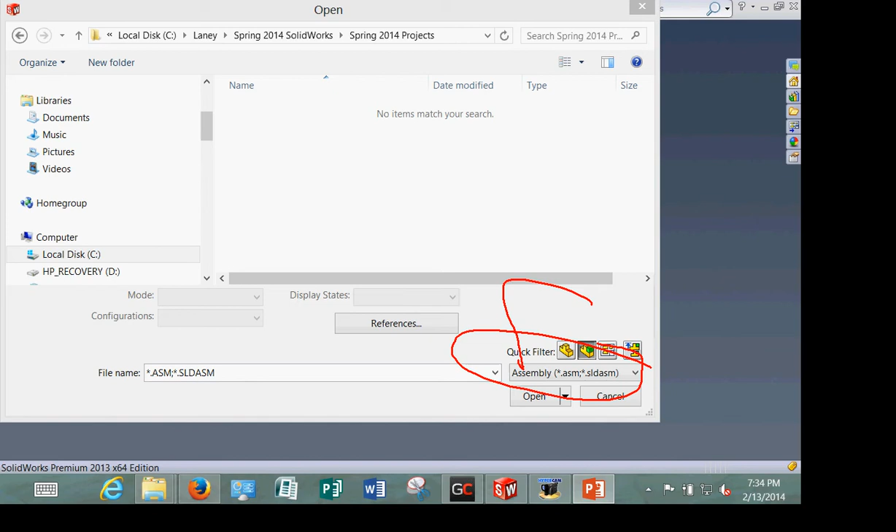And notice right now it's set for assembly, so I don't see anything. Is it really no? Oh, sorry. Huh. No, it's not. Let's see.

Okay, so notice right now it's set for assembly, so you don't see anything. I want it to be set to part, so I can just click it to part, and then I see my part. So if you ever get freaked out, it's because it's not seeing what you got in there. So I'm going to start with the plate, and I'm going to open it up. I just want to open it up mostly so I can see what units it's in, to remind myself the units, because that way I know which template I want to use.

You owe us lunch yet? In terms of checking? Hey, technical issues, not my problem. Crash. The speed of my laptop. Speedy Gonzalez laptop.

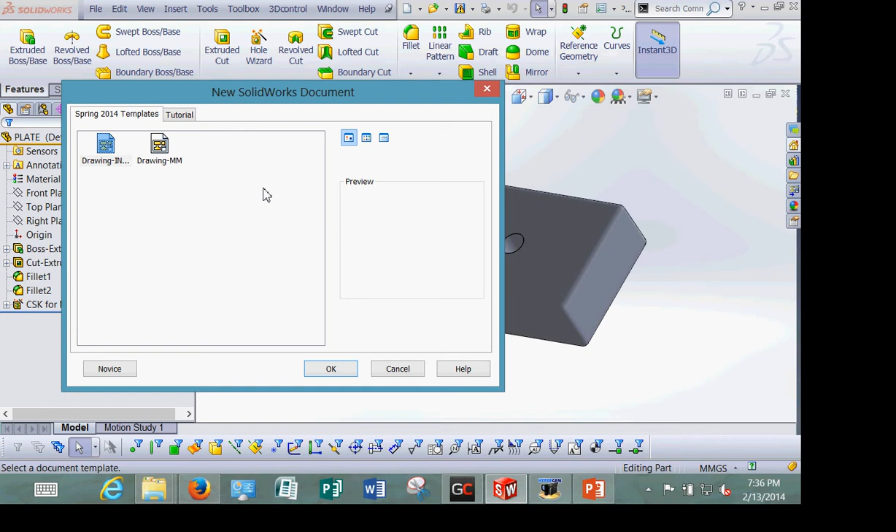Now, I'm going to show you a couple of different ways to lay out your drawings, so you need to watch me.

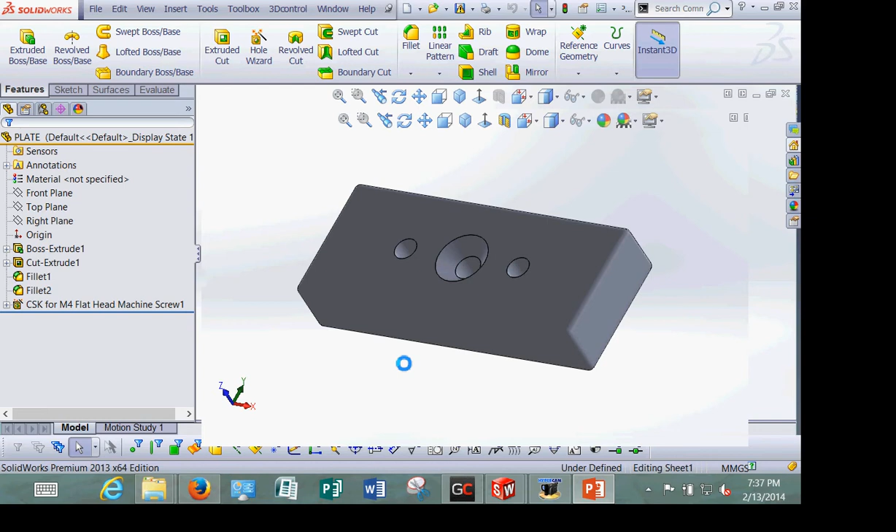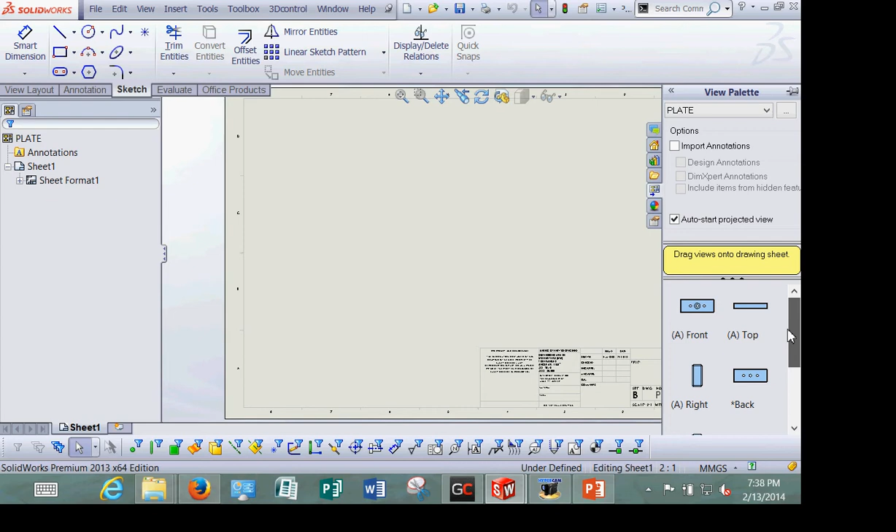So, Ron, where are you going to be in the parade? I know, but which one? I'll be like looking down at you, and I won't know which one you are. I will be confusing. Oh, okay.

All right, so here I am. Here's my drawing. Now remember the first week of class I showed you this resource panel, and you have this tab right here. This tab is your drawing views. I'm going to drag out my resource panel, and you'll notice that here I am on this tab.

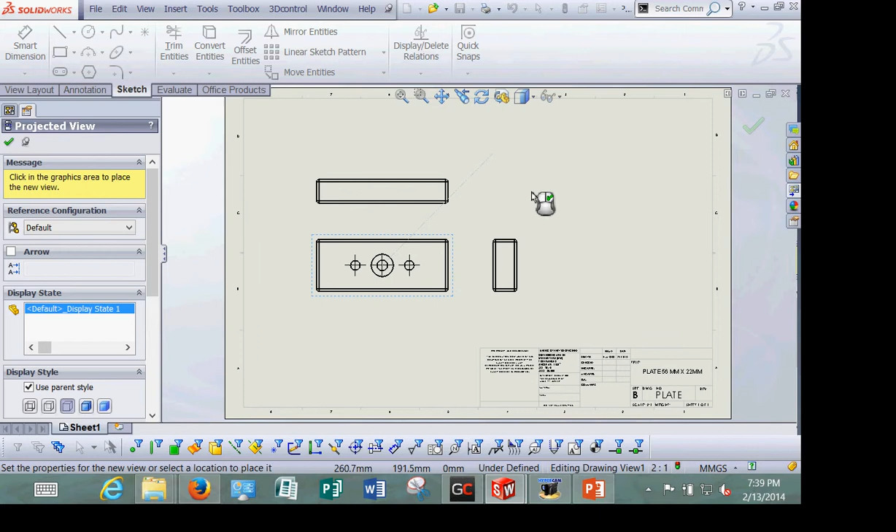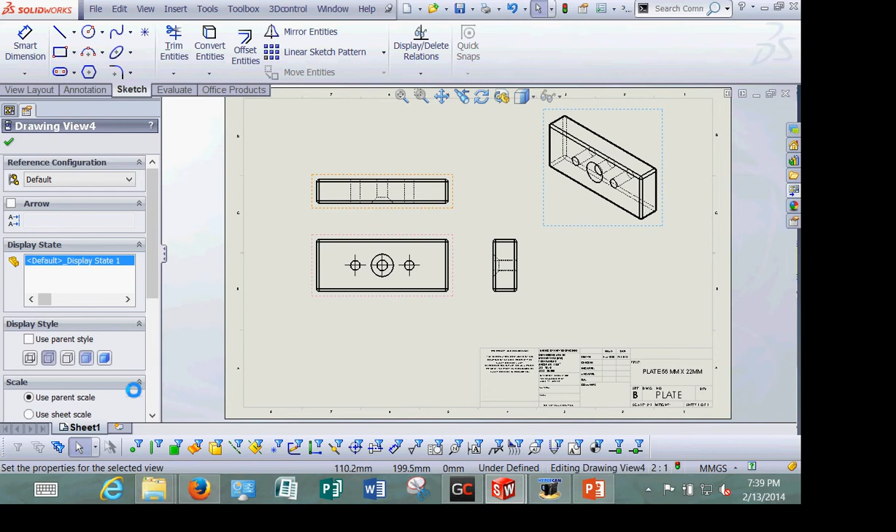Shows me the plate. It also shows me all the views. Do you see that? So I can actually come over here and I can say, okay, I want the front view. I want the top view. I want the right side view, and I want the isometric view.

But it's not showing me hidden lines, so I want to make sure that I set it to hidden lines visible, which is right here. Okay? And then I'm going to green check.

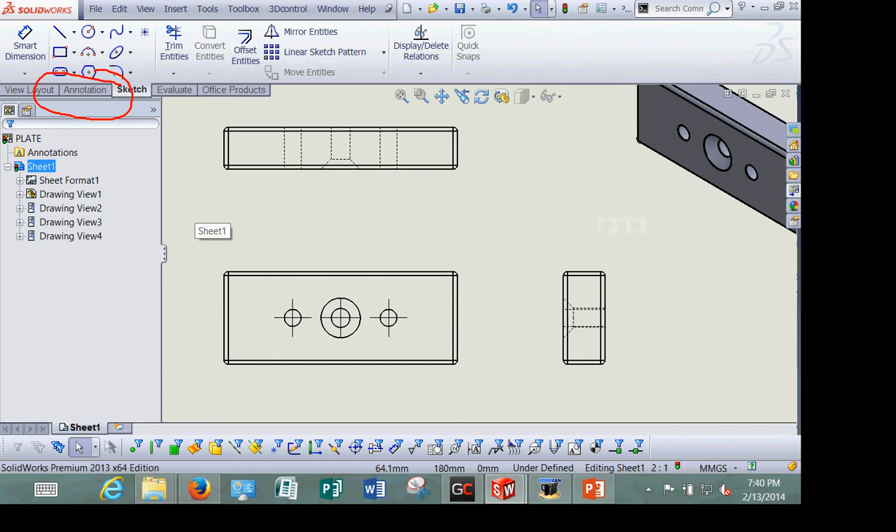Okay, well, it didn't make this one hidden lines visible, so I need to select it, set it to hidden lines visible. I want this one set to hidden lines visible. And then I want this one to be set to shaded or hidden lines. So I uncheck use parent style and say shaded with edges.

And there it is. Take that, AutoCAD. See, that took very little time to lay out the views.

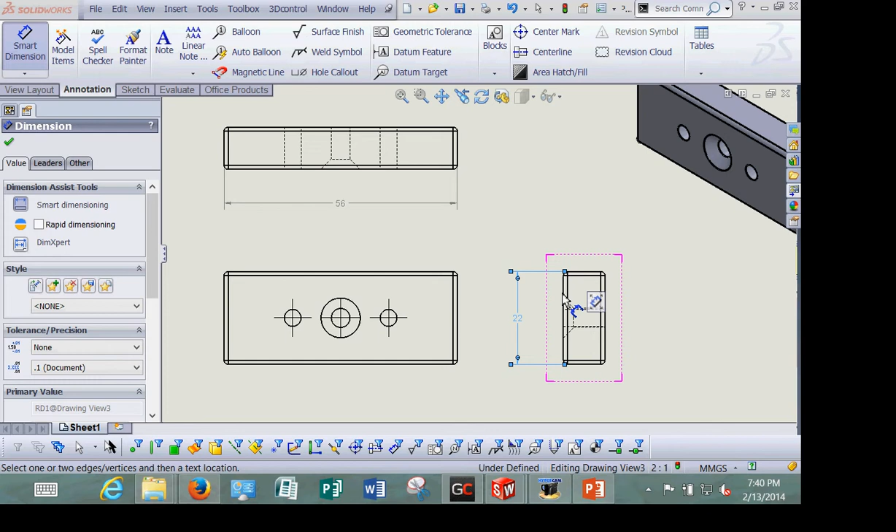So the first step is to set up your views, and notice it automatically filled in the name and the description because I saved the name and the description in my file when I created it.

So then the next thing is to do my overall dimensions. So I'm going to move this up a little bit so I have some wiggle room. And my dimensioning tools are all on the annotation ribbon. So I'm going to click on the annotation ribbon.

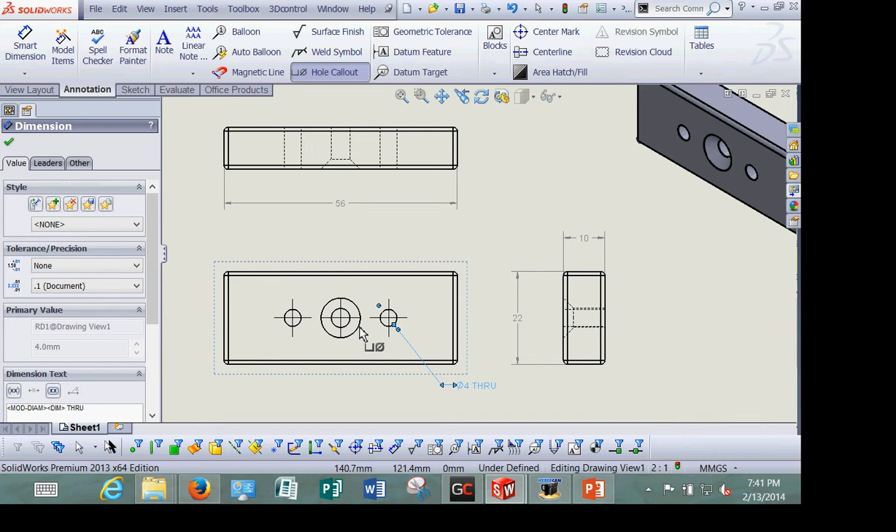And I've got Smart Dimension here. And the first thing I want to do is my overall views. And remember, my overall dimensions should be placed between my views. And I want to make sure, notice how it auto-centered the text because that's an option I set up.

Okay, so the first thing I did was I set up my overall dimensions. Nice, easy. Now I have to dimension the holes, right? And there are two things I need to dimension on the holes: first the size, then the location.

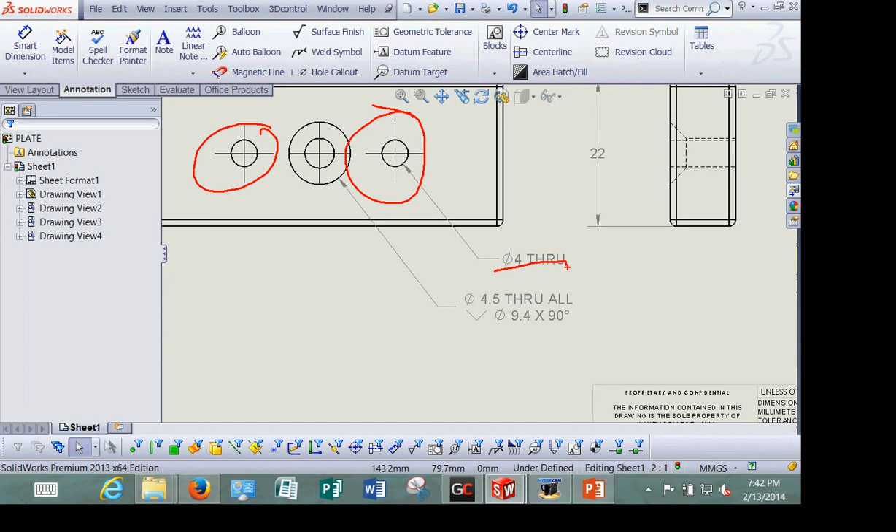To dimension the size, I use the hole call-out tool, not the Smart Dimension tool. If you use the Smart Dimension tool, all it's going to give you is the diameter, it won't give you the depth. And the guy who's fabricating the part needs to know how deep the hole is.

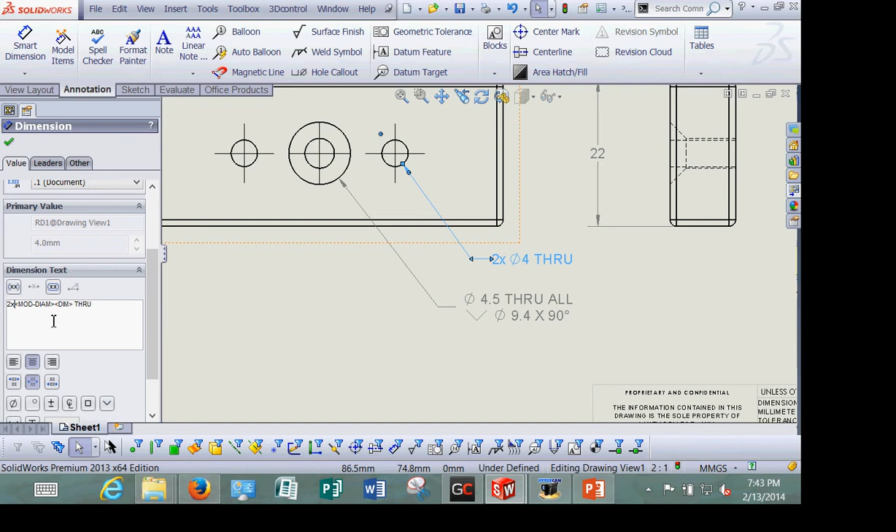So if I use the hole call-out tool and then select the hole, notice it gives me the hole, and notice that it gives me all the information about the hole.

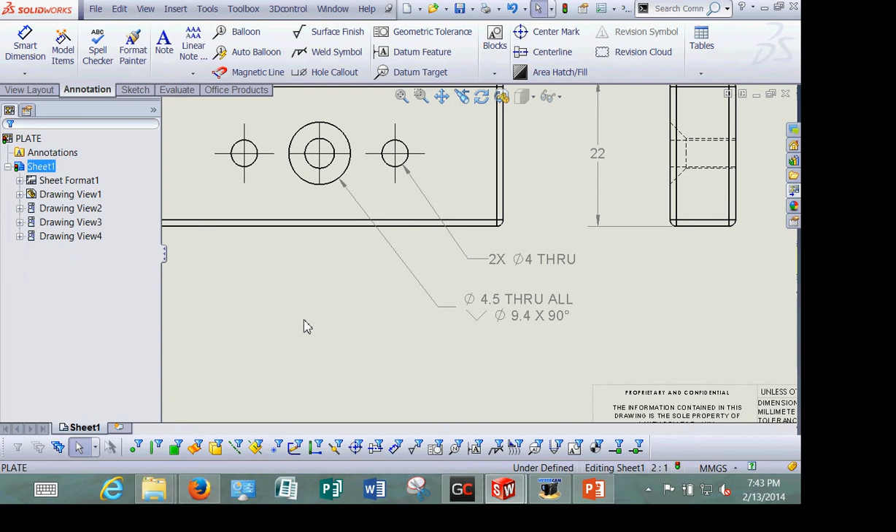Now I want this to be between 30 and 60 degrees, so I'm going to adjust it. Now I have two holes the same size. The reason it doesn't give me a quantity is, you may recall, when we created this plate we created it using the circle tool, not the hole tool. It still knew that hole was through, but it didn't see a quantity, because if we had created it using the hole wizard, I would have placed 2 points and it would have known a quantity.

But because I did it with the circle extrude, it doesn't see a quantity, but I can add that. If I double left click on it, it brings me a text editor right here, and it's got a bunch of information. Now anything in the little brackets, the greater than, less than, that's basically symbology. The mod dash diam is the diameter symbol, and the dim is the dimension.

That number 4 - so if I want to say 2 times, I just type in... do you want to continue? I'm going to say yes. 2x, and I want it to be caps, then green check. So now it shows me 2 times the holes.

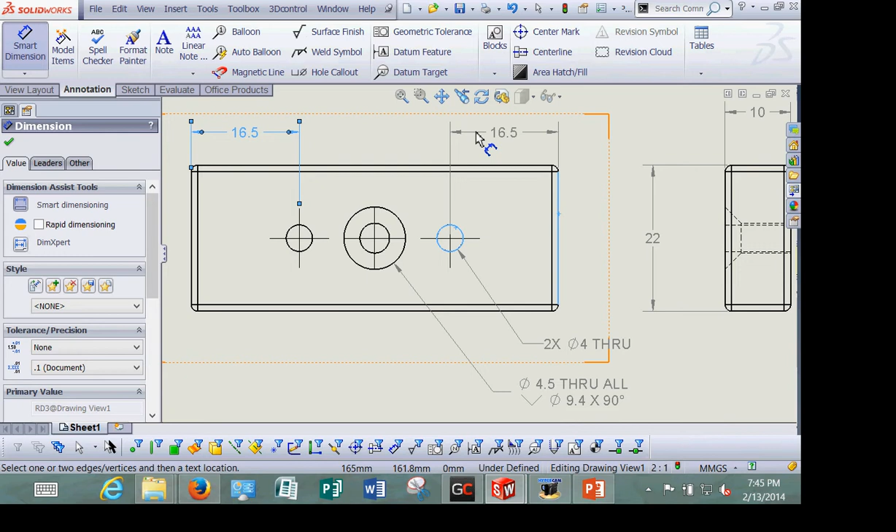I don't want to dimension the 2 holes separately, because that creates problems for the guy programming the part, estimating the cost of the part, and the guy inspecting the part. So if I really want to piss off 3 different people, I would dimension the 2 identical holes each separately. But since I don't want to piss off anybody, if they're the exact same kind of hole, I'm going to do it in one call out.

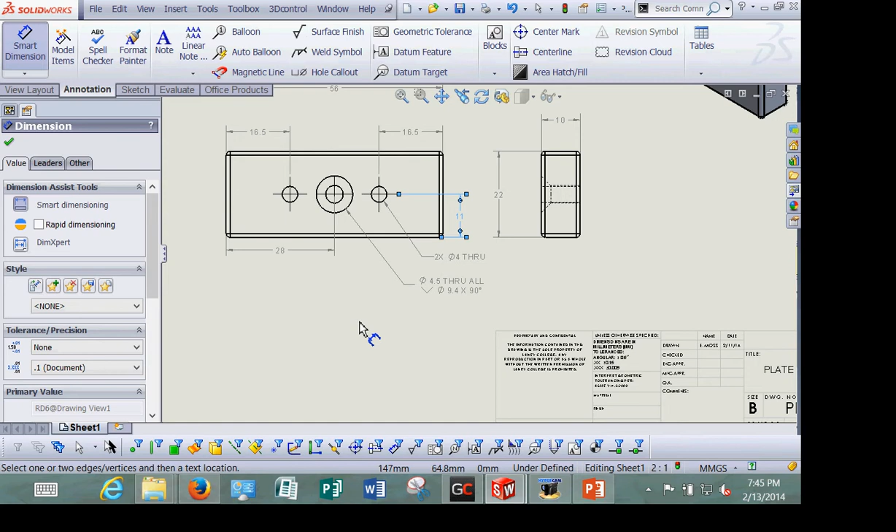Question: for the hole dimension, is the fact that it's pointing to the center of the hole an option set, or do you have to be careful about setting it? It is a system default, but if you really want to, you can change it so it's not pointing to the center.

So any holes left unmarked, you just assume it's the same as the other one? Right. If you have more than... what if that third one happened to be slightly bigger? But they would have a call out, right?

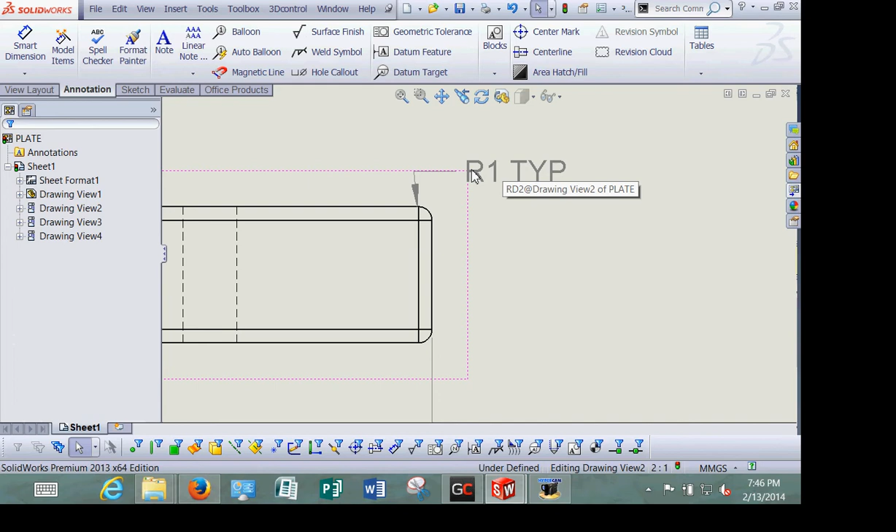Okay, right. So now we want to dimension the location of the holes. Again, dimensioning the location of the holes is going to depend on how you want your tolerancing, how you want to control the position. So I'm going to have to pick an edge for at least one of them, right?

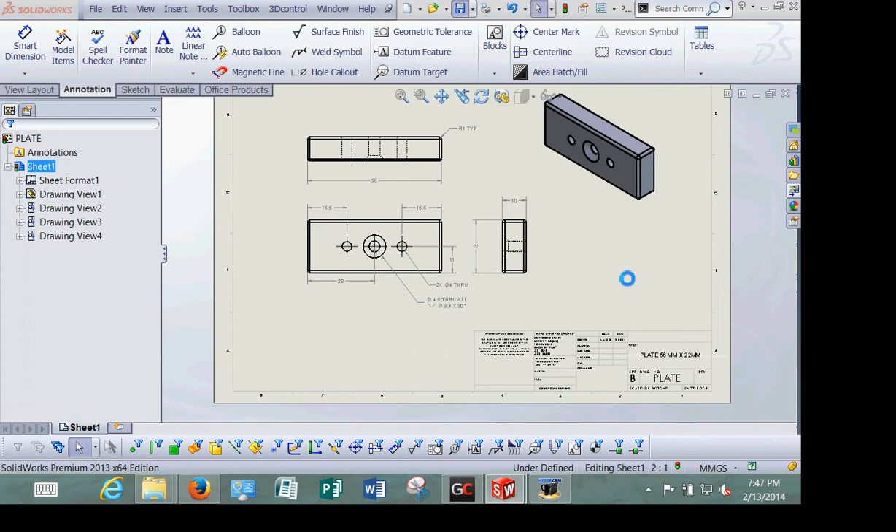Now I could say I want this one and this one both 16.5 from edge, and notice I want those 2 dimensions to kind of line up. See how if I put my mouse over, it'll automatically snap to line those 2 dimensions up, and then I want this set to the center. So by doing it that way, I'm controlling how those holes are going to be.

And that's all the dimensioning I need for this drawing. Is that cool? Very fast, very easy.

What about the height of the holes? What do you mean the height? I've got through right here and through all here. Oh, you're right, sorry, I'm missing the Y dimension. Sorry.

What? The lunch, do I get lunch? Yeah, thank you.

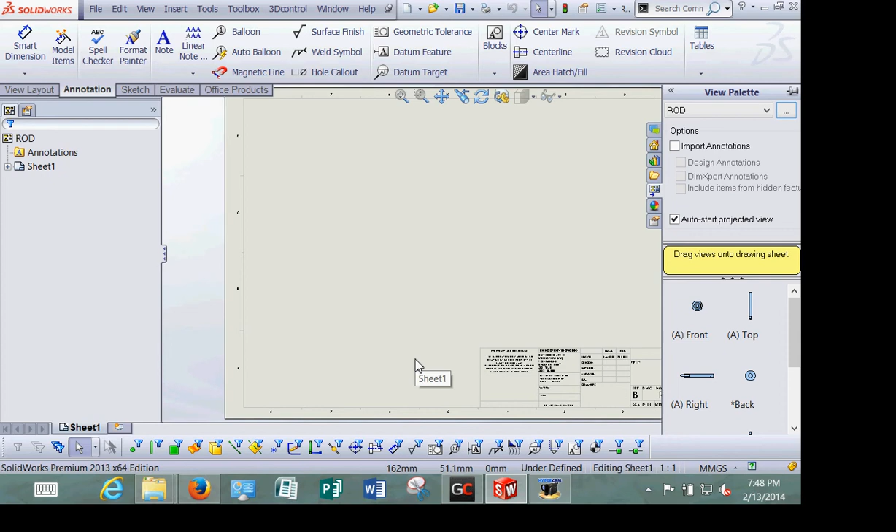And we would need the fillet radius. Thank you very much, yay!

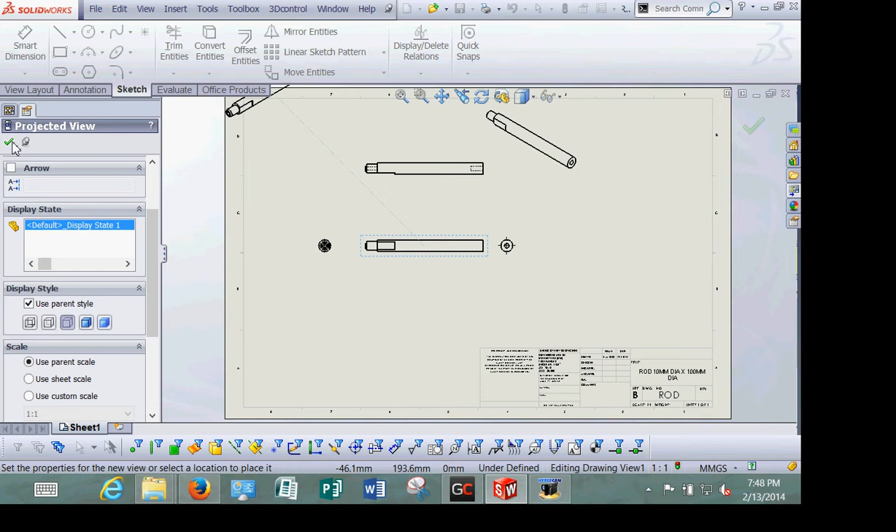Do you have to put any dimension for that at all? You should do a dimensioning for the fillet. What I normally do is, if the fillet's the same, I'll come over here and say TYP, meaning that's the typical dimension for all of them. Notice how my leader got messed up? So I want to make sure it looks correct. See that? Different edges have different angles for the fillet, then I would have to call each one out.

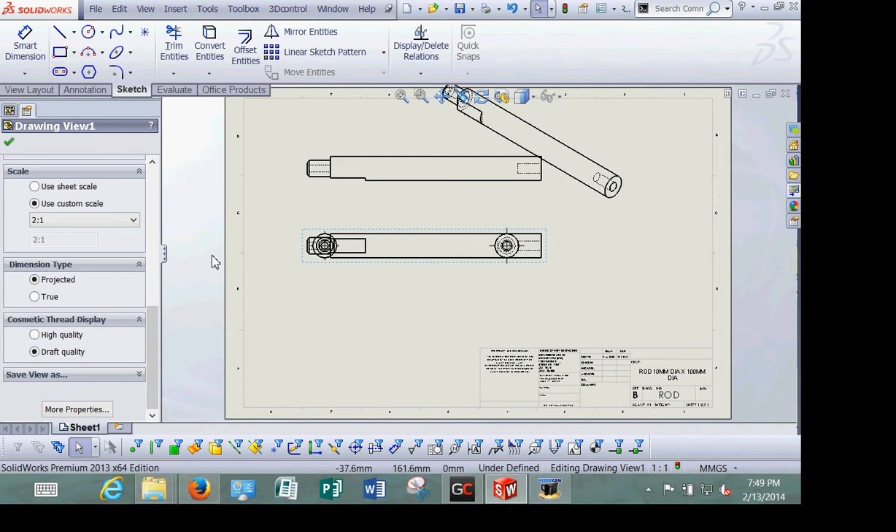Yeah, okay. Well, this one shows the countersink right here. That's part of the hole note, that's why you use the hole note.

Okay, alright, so I'm going to save this. I'm going to close it.

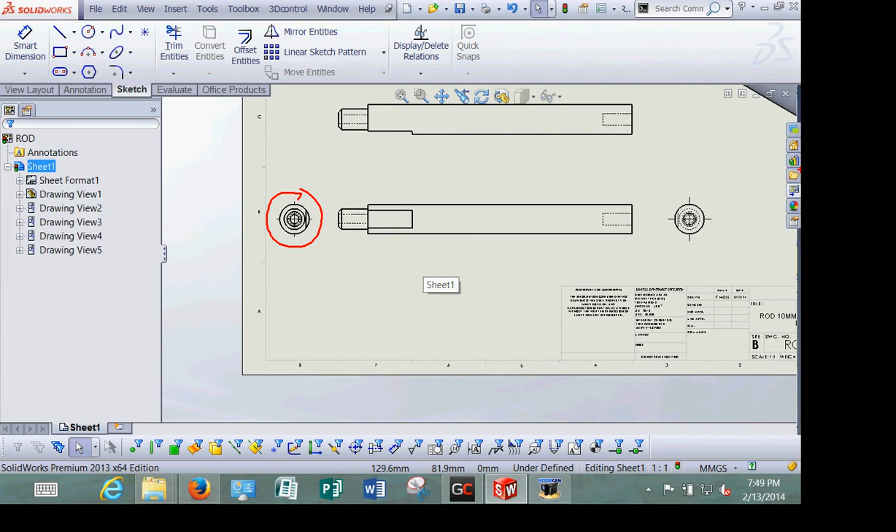One of the reasons why it's so slow is I've got 2 seats of SolidWorks open, so I'm going to close one of them. And I'm going to close my plate. So now, what if you have nothing open?

I'm going to do the rod next. I'm going to come over and say I want to do a new drawing. It's going to be metric. I'm going to say okay.

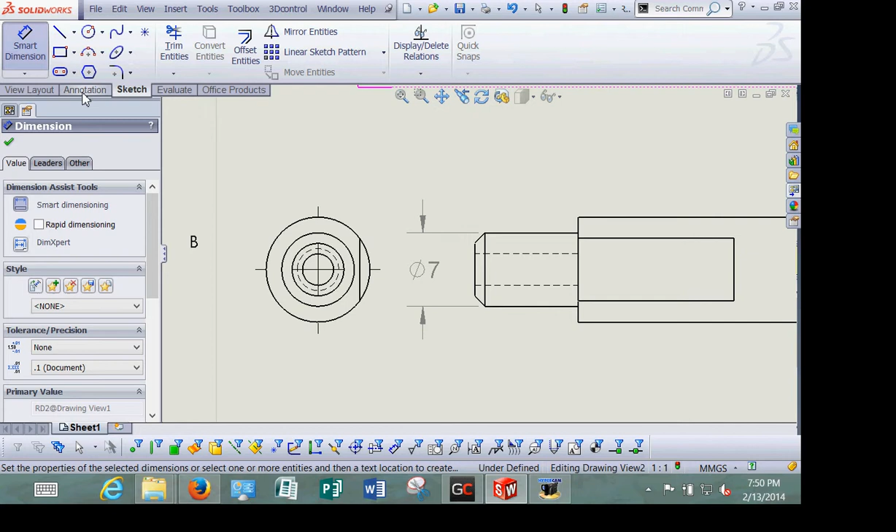So now, if I come over here, I don't have anything in my view palette. So how do I get it? Well, I can come over here, I can select this dot, dot, dot button, and then I can say I want to do the rod. So I don't necessarily have to have the part open to use it.

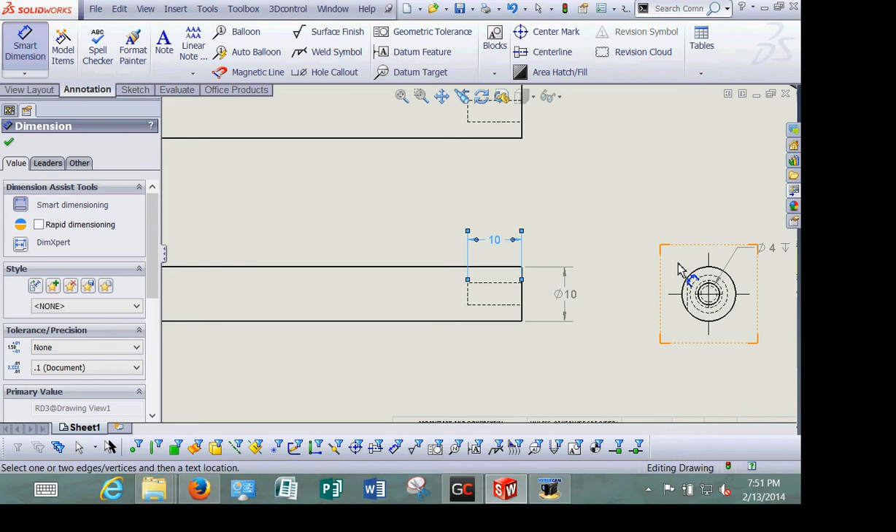Notice it automatically gave me a bunch of views. Well, the front view, this front view is not the front view that I want for my drawing. What I want is, I'm going to use my right view as my front view.

I want to set it to say that it's going to be hidden lines. I'm going to say okay, I want this view, this view, this view, and this view.

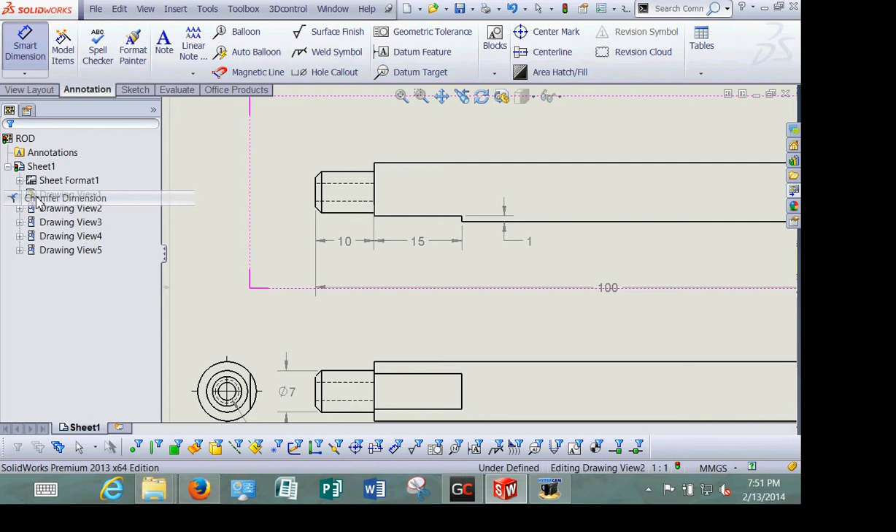And if I want it to be bigger, I'm going to say I want this to be hidden lines. Now notice, right now it's kind of small, but I can make it bigger by saying okay, I want to use a custom scale, and notice it's giving me a bunch of different choices.

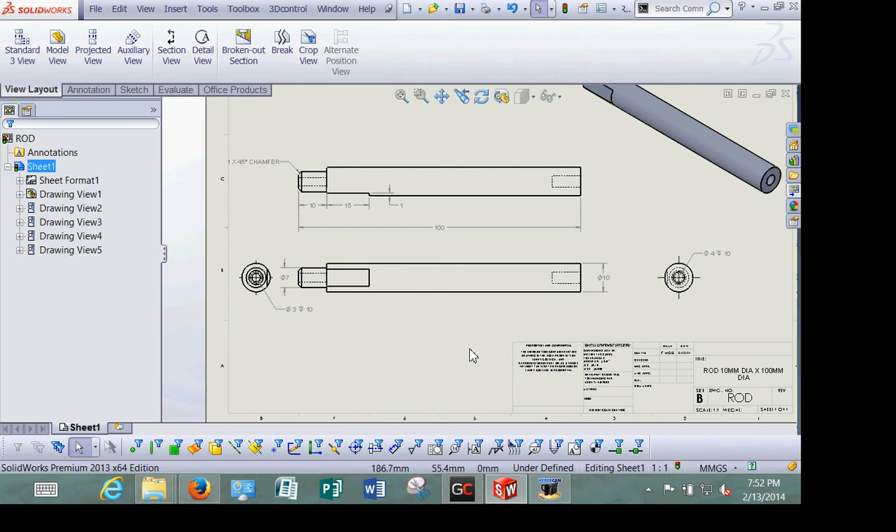Let's say I want 3 out of 2. Well, okay. Or maybe I want 2 to 1. Yeah, I'm going to go with 2 to 1. So then I can just drag the views over.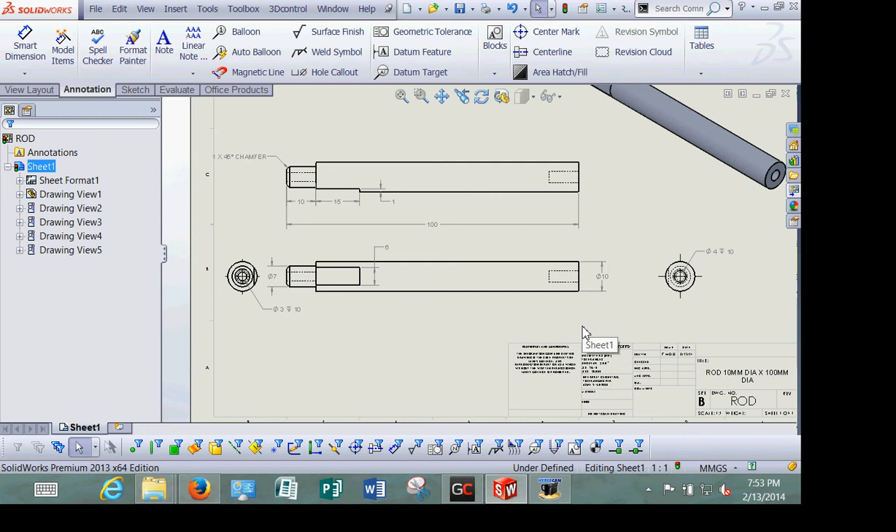And I'm going to move this view over and set that view to hidden with edges. And I'm going to move this down a little bit and this down a little bit. So this is how I want the rod laid out, because there's a reason why I want it this way.

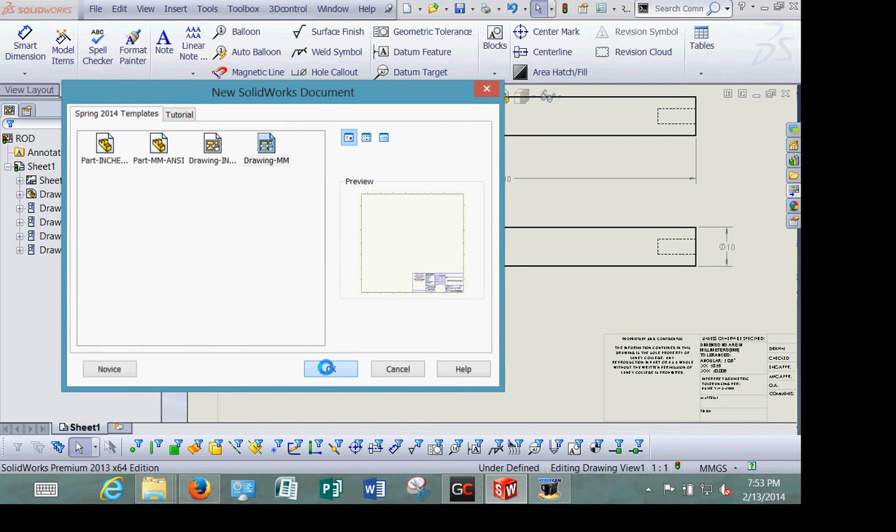I've got 2 different holes. I've got a hole here and I've got a hole here, and I need to call out both of those holes. And they're on 2 different ends. Now the other thing is I've got my overall dimensions. I've got a diameter here. And I've got a diameter here.

And I want to add a hole callout for here, and notice it gives me a dimension. Let me just double check to see. No, that's the one I want. Okay, so that's the hole I want. I'm going to delete that.

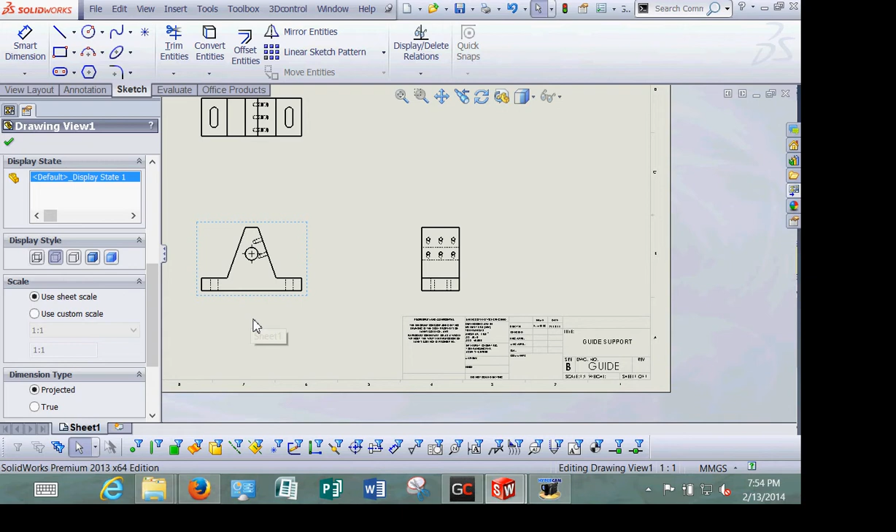And then I've got a hole callout here. So what I do not want to see is this. Why don't I want to see that? It already says on the hole, and I'm dimensioning the hidden line. So I don't ever want to see that dimension.

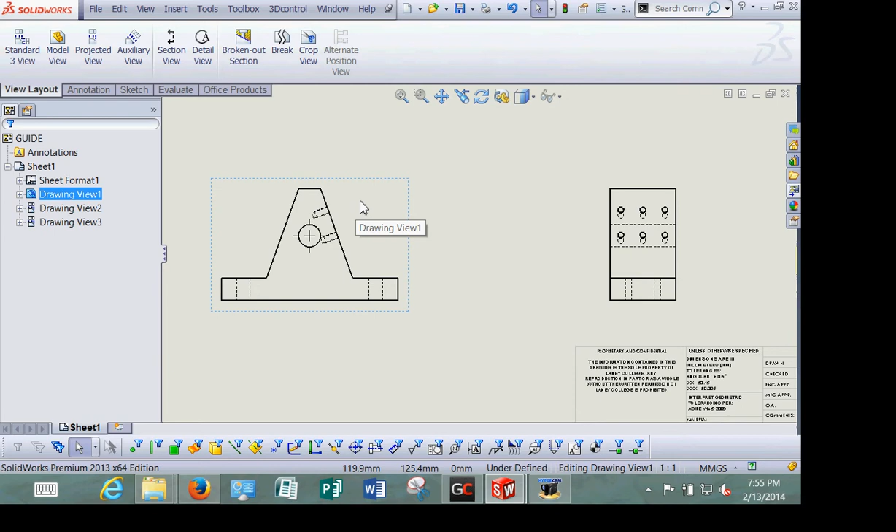All right, then I also want to see the overall dimension, right? And I've got a dimension from here to here, and a dimension from here to here, and a dimension like this.

Now I also have this chamfer here that I want to dimension. I have a chamfer note, and the chamfer dimension is right here on this drop down. So I want to be able to use that. So I'm going to place a chamfer dimension.

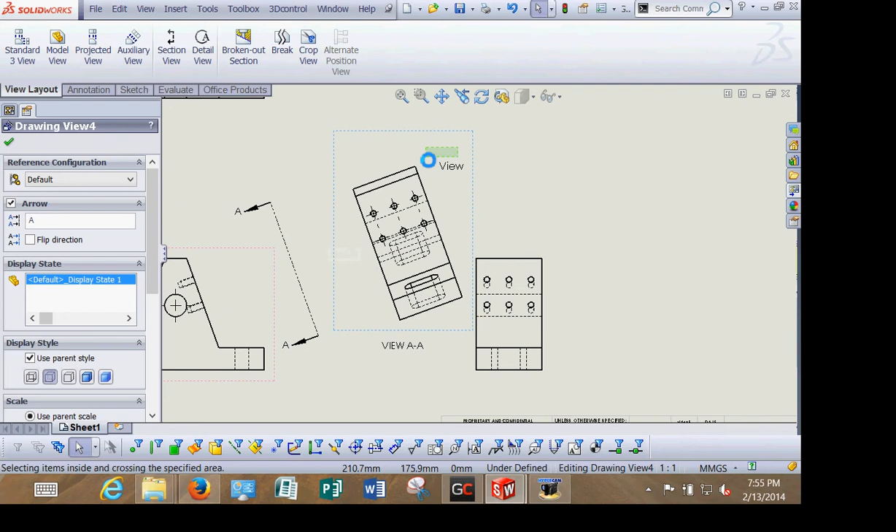I select this edge, and then I select this edge, and notice right there. See that? See how nice that looks? And I can add the word chamfer if I want, just to make sure that it's very clear what it is. And then pull it out so that my leader looks proper.

So I'm going to kind of look at it and see, do I have everything that I was supposed to have in terms of dimensioning? I think I'm good.

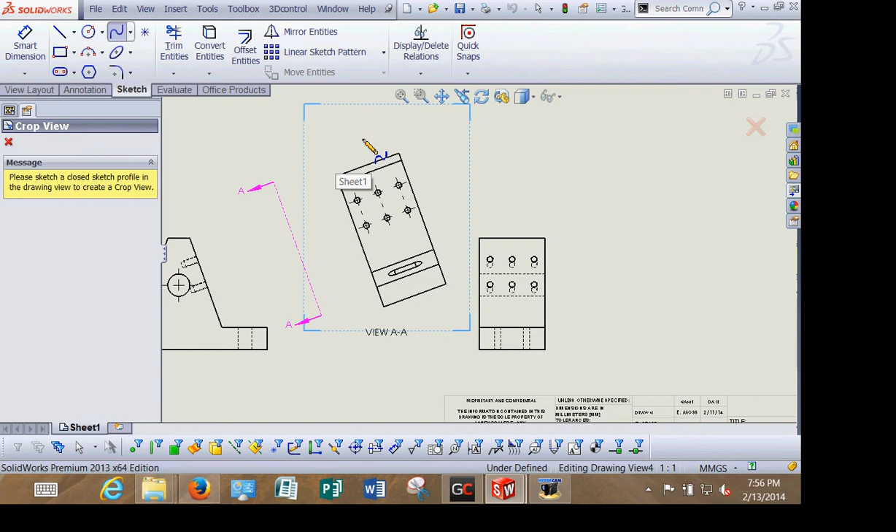It didn't take very long, now did it? No. Okay, it's going to take you guys a heck of a lot longer. I have, oh yeah, I do.

So I'm going to come over here, and I'm going to add that dimension right there. So there's lunch.

Okay. All right. Well, you got these. I'm giving you guys pizza, right? Yeah, on March 20th.

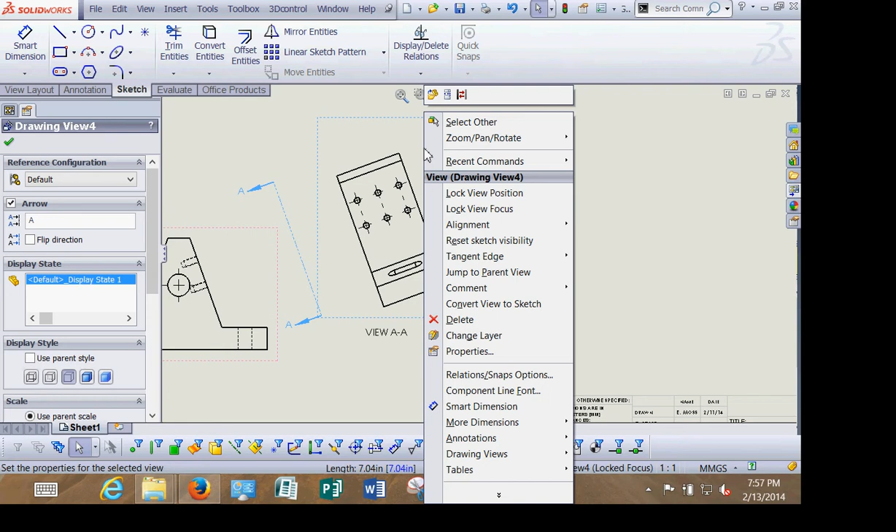Okay, so I'm going to save this up. Actually, this dimension we should edit. Actually, the last dimension will be automatically done by depth. By this one? Yeah, I think so too.

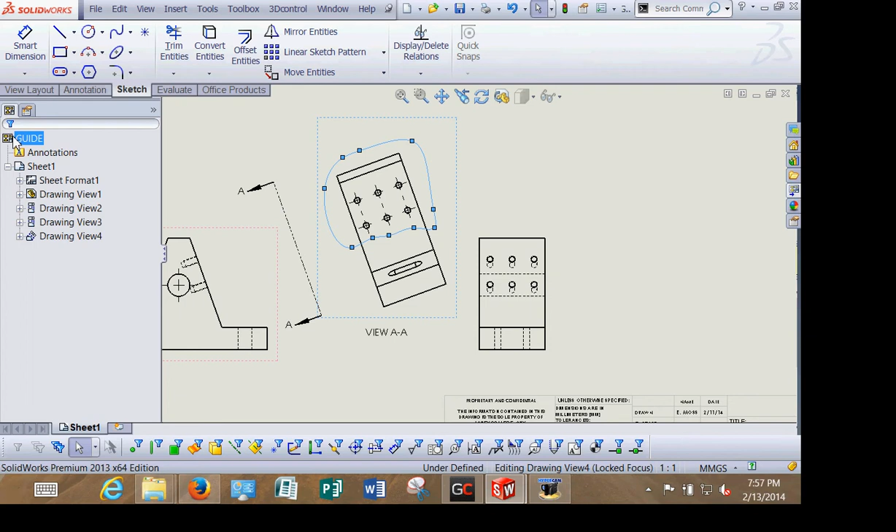Okay, so now I'm going to create the guide. The guide is the most complex, and in the book she shows you how to do a lot of the guide drawing.

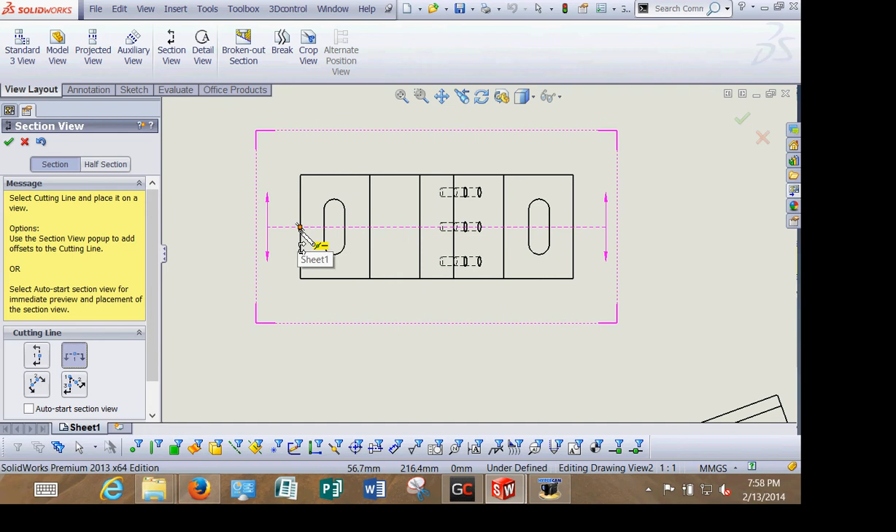I'm showing you a couple different ways using the View Layout tab, but I could also use the View Layout ribbon. I'm going to come over the View Layout ribbon and say Standard 3 View, then it asks me what document I want, and I'm going to say Browse, and select the guide.

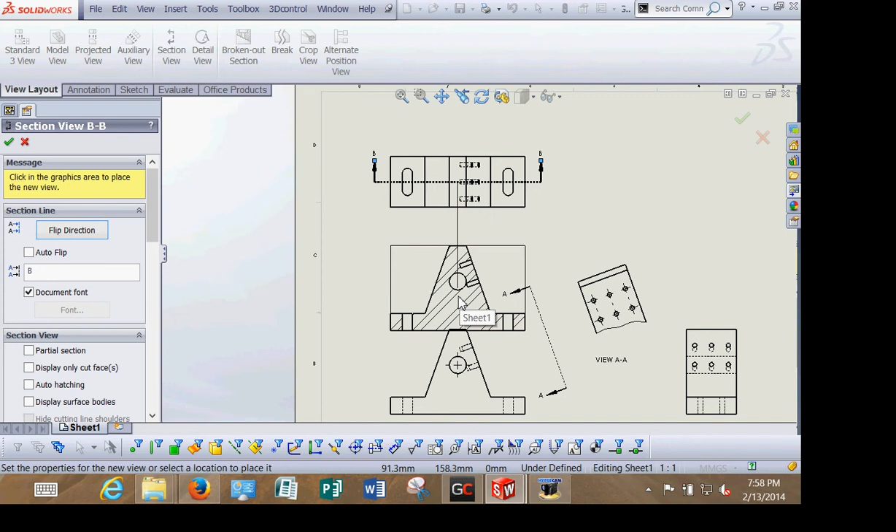Wow, that was hard. So place that. It automatically brought up this whole callout, I don't want it. I also want to make sure this is set to hidden line so I can see the hidden lines.

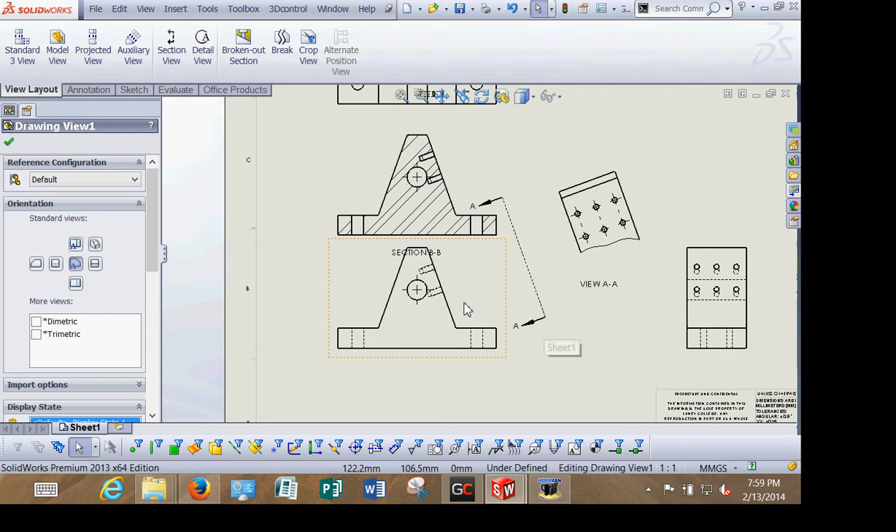Now, these holes here are on an angled face, so to dimension those for profile, I need to use what's called an auxiliary view. If you go to View Layout, you can see auxiliary view.

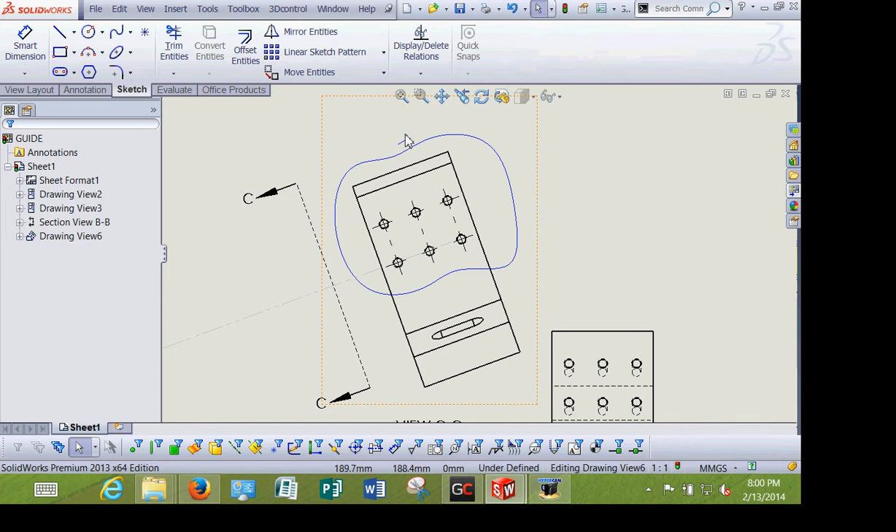I can also create an auxiliary view on the right-click menu. If I put my mouse over the view, right-click, and say Drawing Views, Auxiliary View, that also brings up auxiliary view. I can select it from here or from here, they both will place the same view.

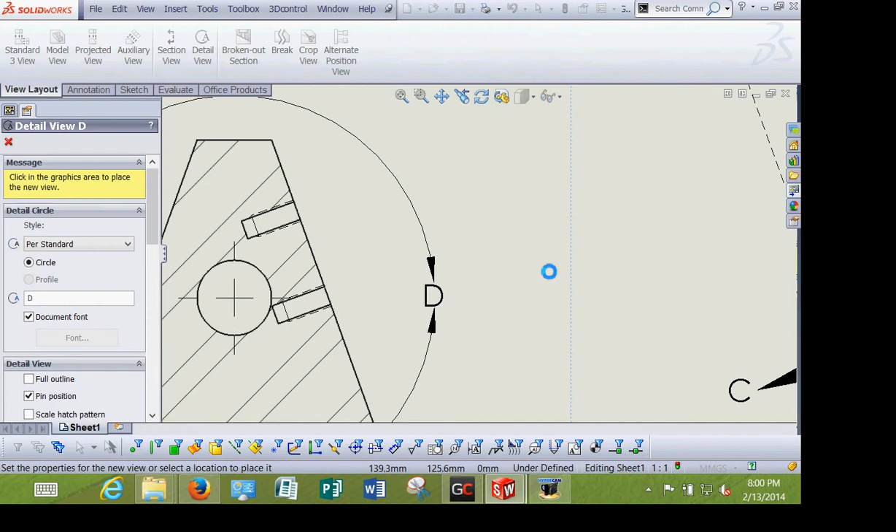So I'm going to select the auxiliary view, then select the edge of the face, and there's my auxiliary view. For most auxiliary views you don't have to set them hidden line, you can set them hidden lines removed because we want to focus just on these holes.

Now I can crop that view because I'm just looking to focus on this view. I really don't care about this part right here, that's not what I'm looking to dimension.

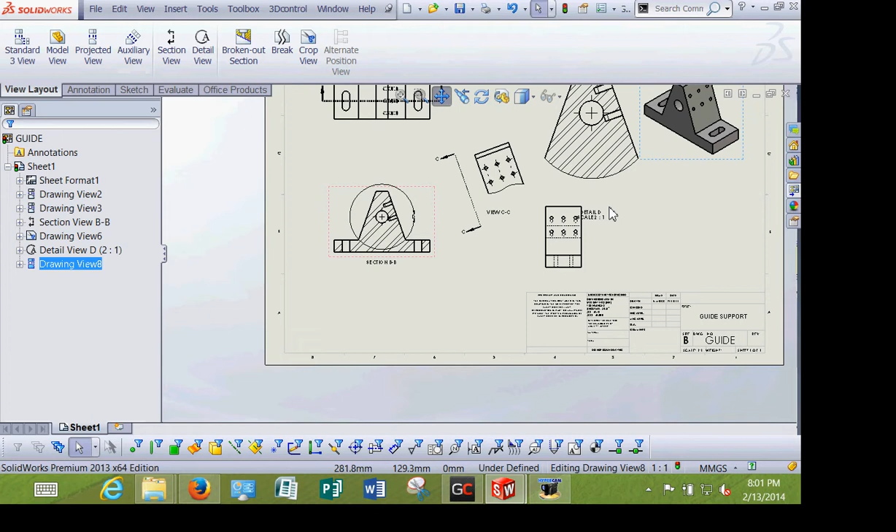To crop the view, you use a sketch, and this can be tricky, so watch me. You want to right-click on the view, go to Drawing View, Crop View. It's going to ask you to create a sketch. I'm going to use the Spline Tool - I could also use a rectangle or circle, it doesn't matter, just the spline looks cooler. So I'll come over and create this spline.

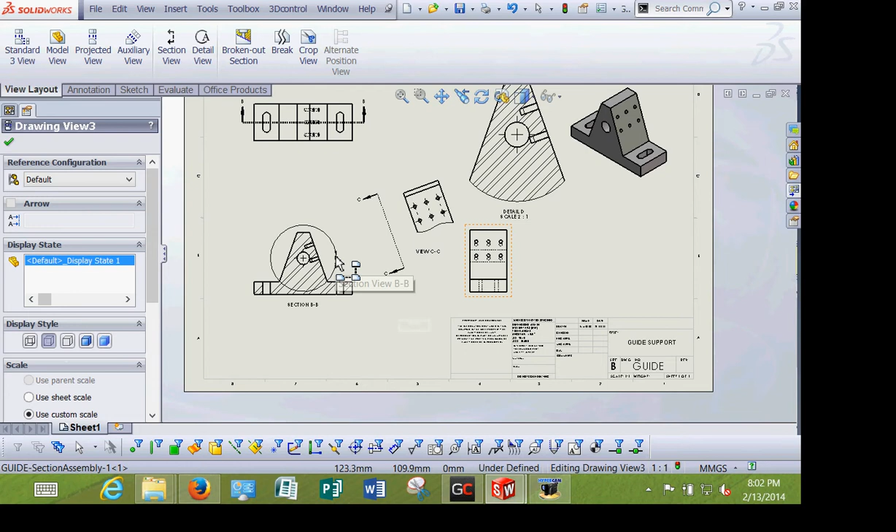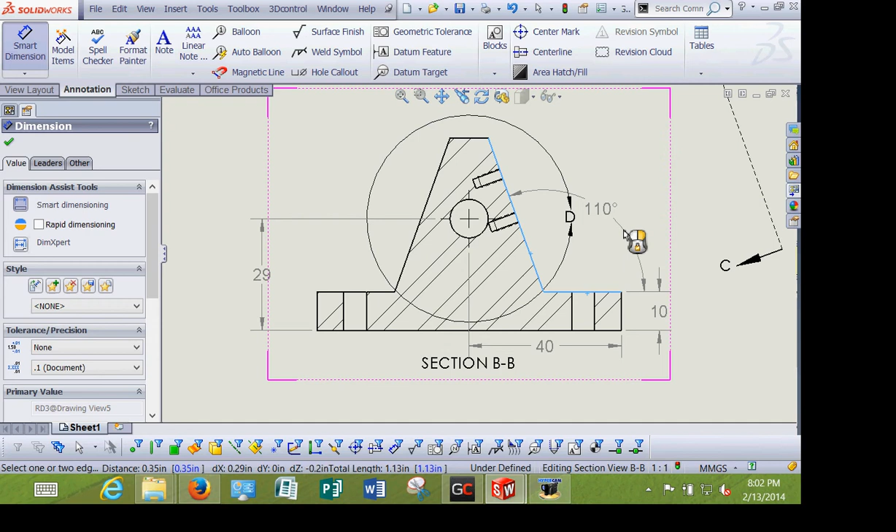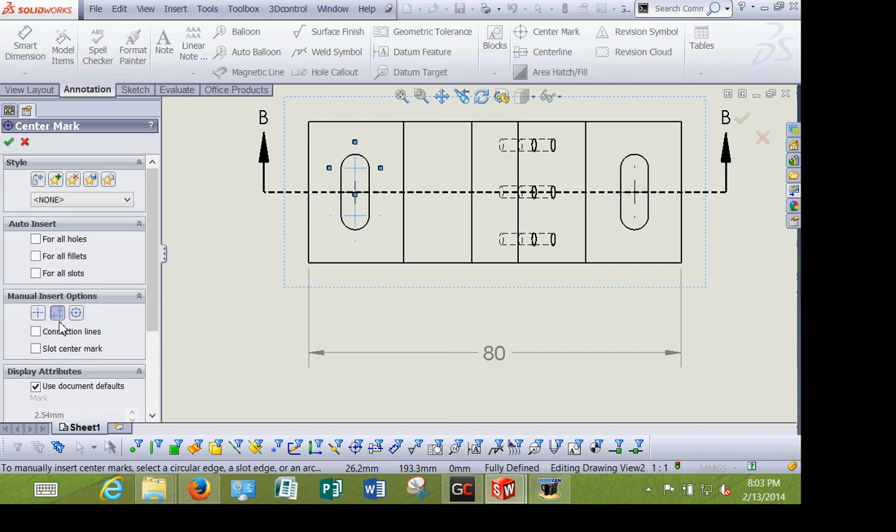Once again, it doesn't like what I did, so I'm going to select the view. Sometimes it takes more than one time before it will see the sketch. And there it is - see how the view got cropped? It looks a lot cleaner.

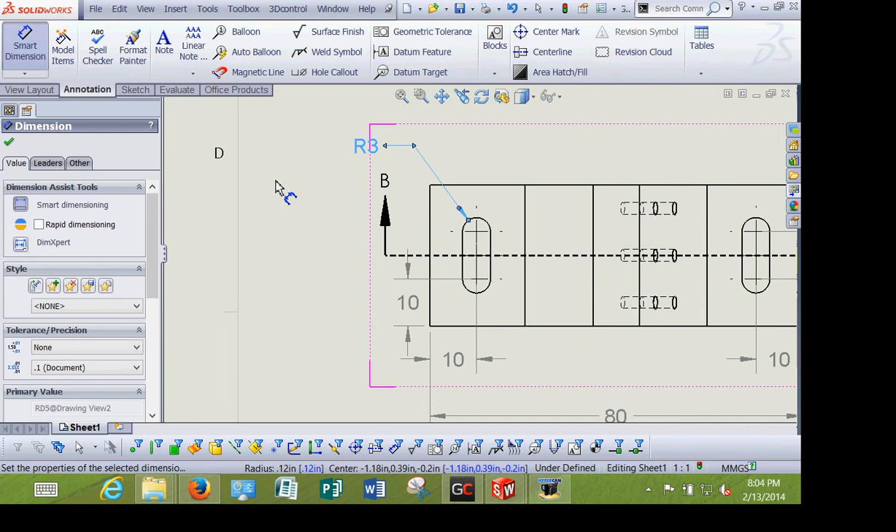Now the other thing you can do, in the book she has you create a section view. To create a section view, I select this view, select the section view, and I can rotate it. I'm going to rotate it this way, and I want it located on the center.

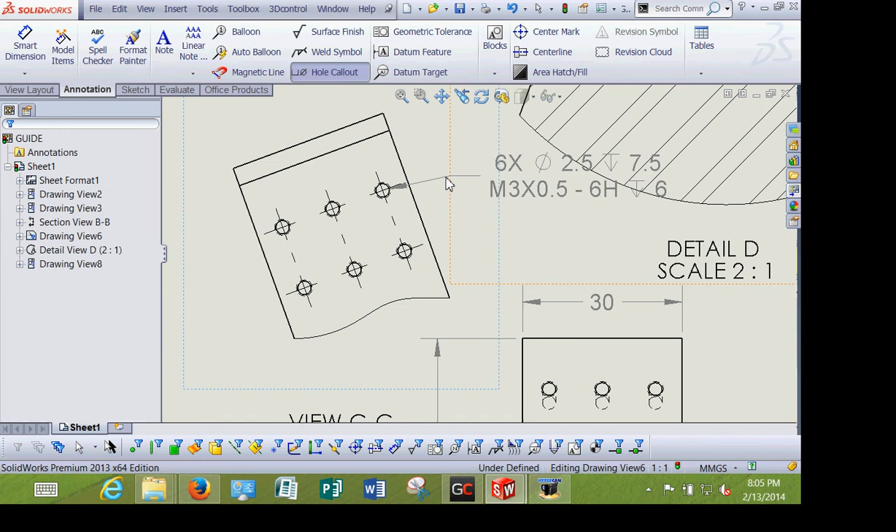Generating it, and there it is - so there's my section view. Once again, that section automatically called out that hole, and that's not the correct way to call out the hole, so I'm going to delete that.

Now because I have the section view, and this section view looks the same as this view, I really don't need this view, so I can delete that view. The problem is it'll ask me if I want to delete the auxiliary view. I'll just say no.

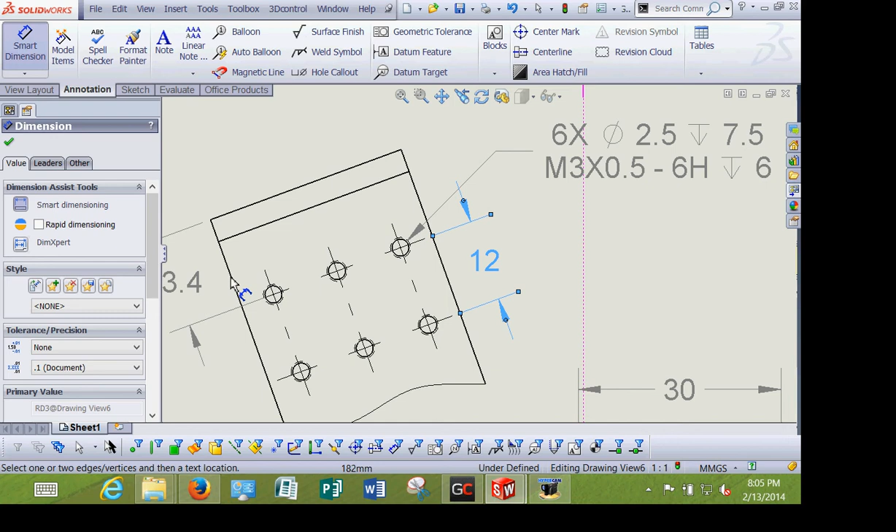But I'm going to have to - it's going to delete the auxiliary view, so I'll have to recreate it. I'm going to create drawing view, auxiliary view. There's my auxiliary view.

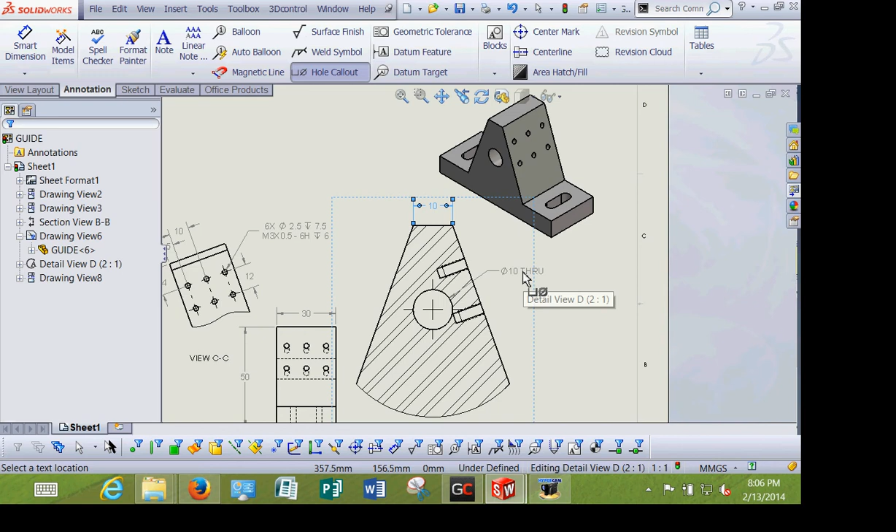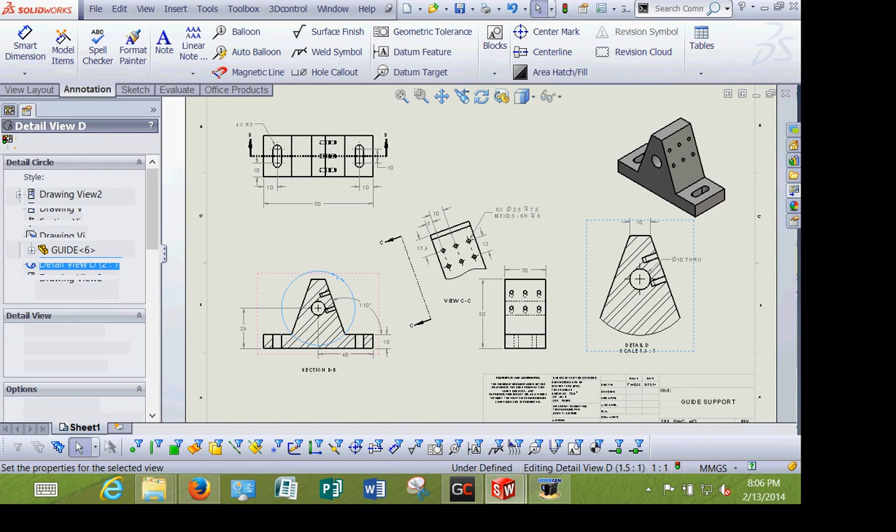Then to crop it - now when I created the spline this time, I have a little bit of an error. Can you see what the error is? I've got a little tiny piece of spline right here, and that would create problems. So there's that crop view.

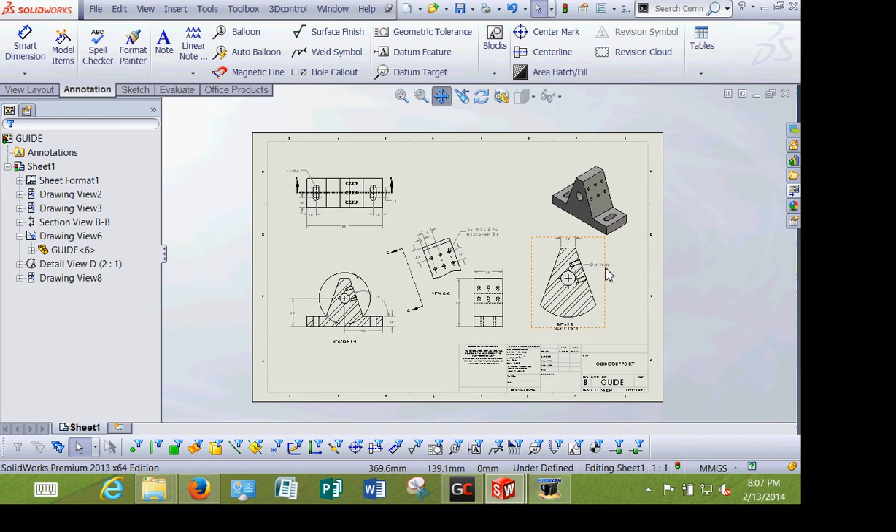And then the last type of view that she talks about in the book is a detail view. If I wanted to create a detail view, that's basically a close-up view. So I'm going to just select this section and put it up there.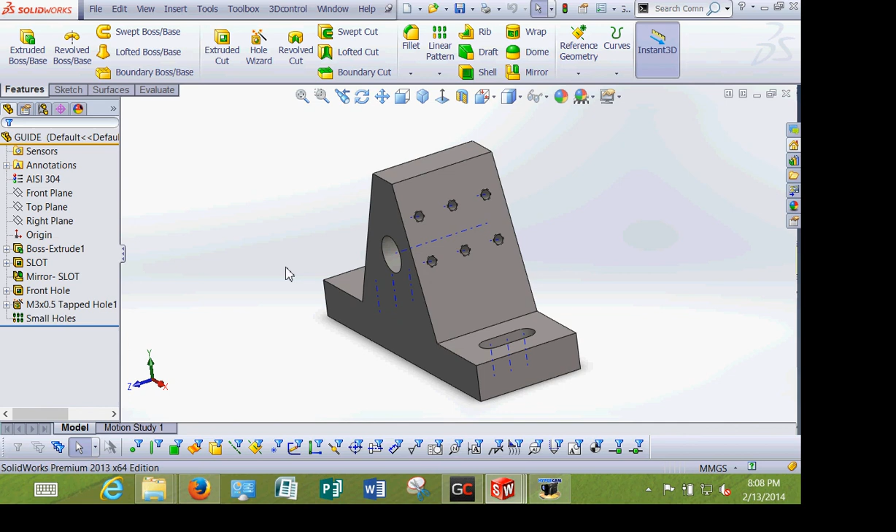And then I have one more view that's missing, and that's the isometric view. If I select projected view, that gives me the projected view right there. I'm going to set it to hidden with edges. Okay, so these are the various views that I have.

Now what's important is I need these two views, this section view and this view, to line up, they need to be aligned. So to do that, there's a tool called alignment, and you can say horizontal or vertical.

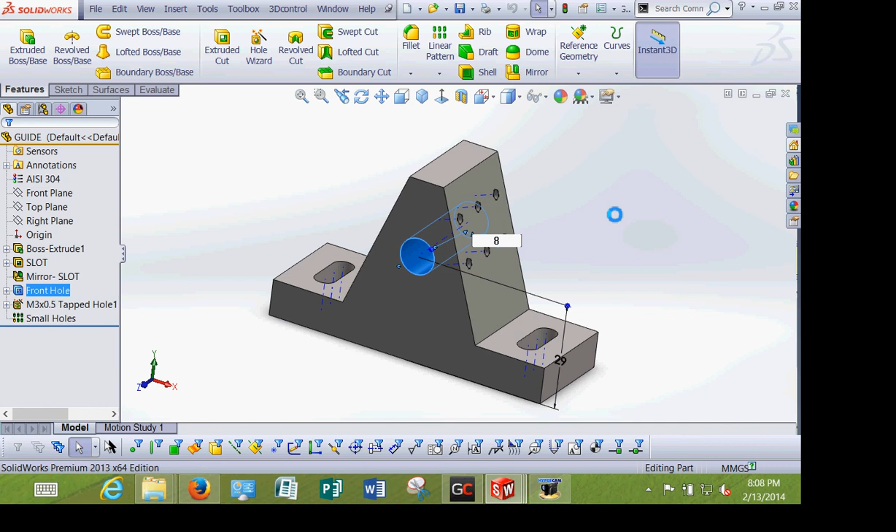I always get confused which is which, so I'm going to say align vertical, between these two. See, I had a 50-50 shot at getting it right. So I want alignment by horizontal, and notice that automatically set those so they were lined up.

So that's nice, so now it's time for dimensioning. Start with my overall dimensions - I always place my overall dimensions first. If I've got my overall dimensions, I've got half the battle done.

And I kind of look to see how I can make it look a little bit cleaner. I don't like overlapping lines if I can possibly avoid them.

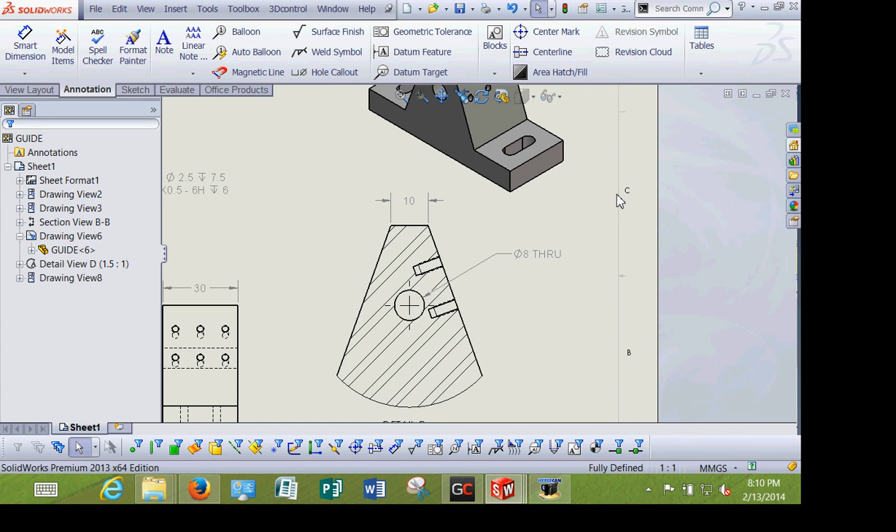Okay, got that. All right, now the slots are always kind of interesting. I've got a center mark right here, so I can add center marks to my slots. And if I want those linear center marks, so I have a center point here and here, I can add that. See, so how you adjust it—whether you have it in the center, no connection lines, or just centers—makes a difference in terms of how easy it is to read.

I didn't necessarily want that. Fix that in a second. And again, I want to line these up, so I look for that little yellow dot, dot, dot to make sure that everything's lined up.

And that R3 is actually 4 times, right? So I need to give it a quantity.